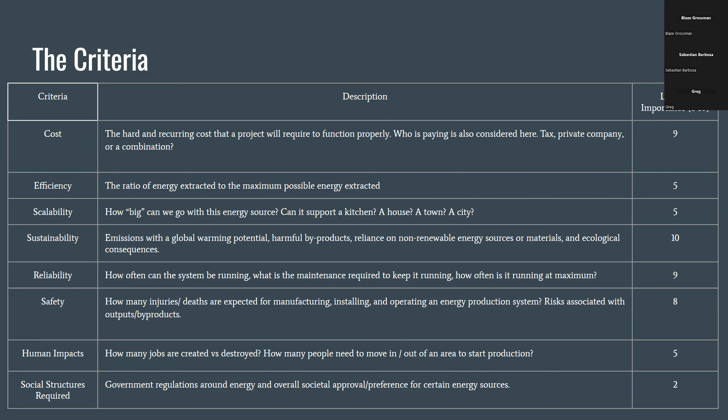so true. All right. So I researched the hydroelectric power.

So basically, hydroelectric power uses flowing water with a dam and channels the water through turbines, which then transform potential energy into electricity. Different types of turbines can be employed, primarily determined by the head of the plant and other factors such as efficiency and cavitation.

The world's top five largest capacity power stations all operate on hydroelectric power. On a smaller scale, hydroelectric power can provide power to smaller buildings with a running water source nearby, and they would only need a water diversion system, a turbine-slash-pump, and a generator to do so.

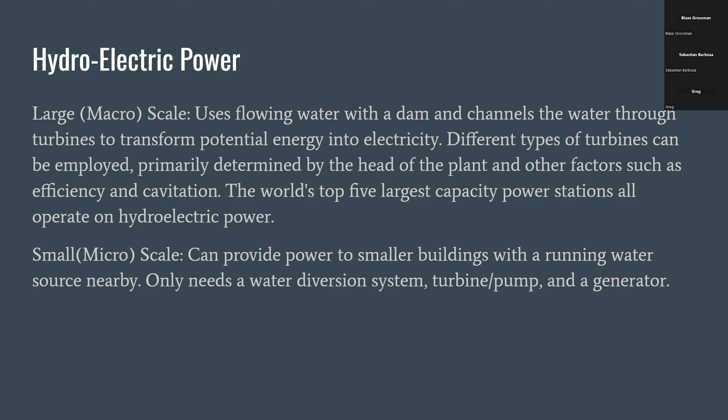Now for the cost criteria, when building a large hydroelectric power plant, you're going to be paying about $1,050 to $7,650 per kilowatt of power produced. On a smaller scale, it goes up a little bit, $1,300 to $8,000 per kilowatt.

But there's a pretty low maintenance cost and a long life for all the parts on the power plant. A typical lifetime for these plants is about 100 years, which is pretty good, and the maintenance costs per year are about 1.5 to 2.5% of the original investment, which is not that bad.

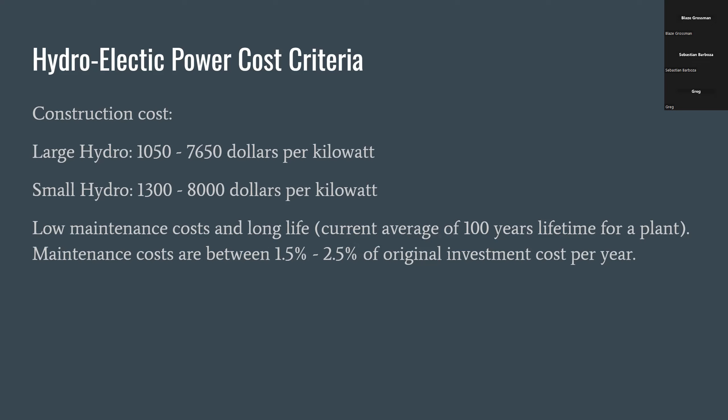In terms of efficiency, hydroelectric power plants have an efficiency of about 90% when converting the potential energy of the water into electricity, which is the highest efficiency of any energy source.

One of the components that contributes heavily to the efficiency of hydroelectric plants is the use of pumped storage, where basically the reservoir functions like a battery, storing energy in the form of water during periods of low demand, and then generating maximum power during daily and seasonal peak periods.

One benefit of pumped storage is the ability of hydroelectric generating units to initiate quickly and make swift adjustments in output.

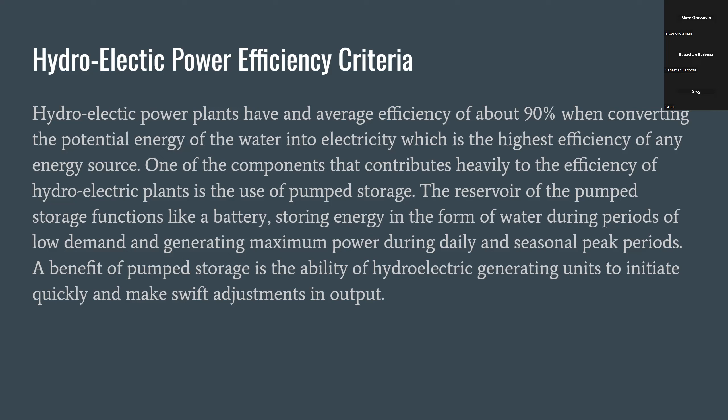For the scalability of these, it's pretty good because they account for the top five largest systems, but they can also be scaled anywhere in the middle and all the way down to a little tiny one, which could just provide power for a shack or something near a river.

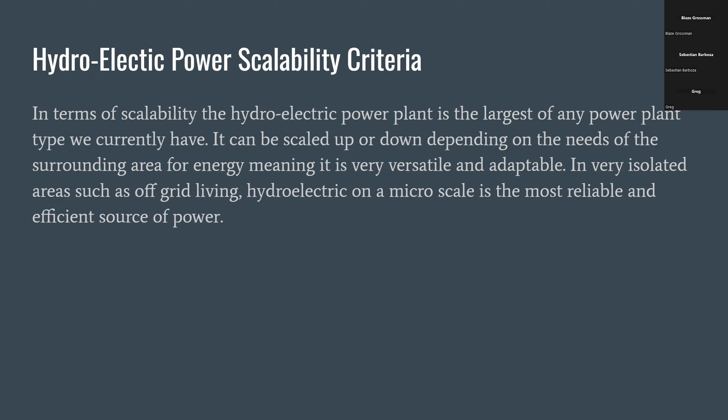The sustainability of these plants is pretty good. The only fuel that's used is the water to turn the turbines, which is entirely renewable due to the water cycle, which is powered by the sun. One negative effect is that when human-made reservoirs are constructed for hydropower facilities, they change the way carbon is emitted and stored in the river systems, which sequesters some carbon.

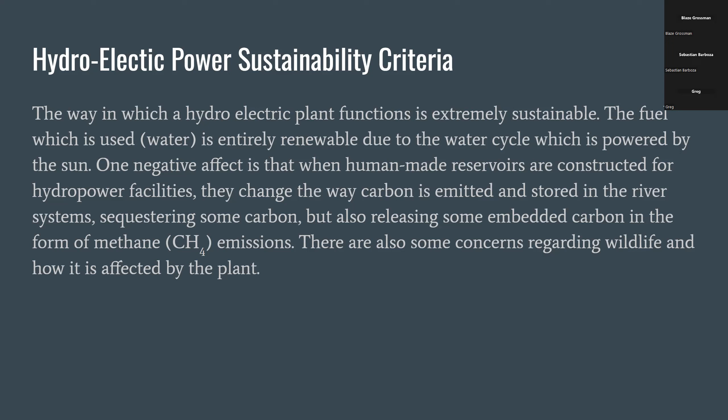There's also some concerns regarding wildlife and how it's affected by the plant.

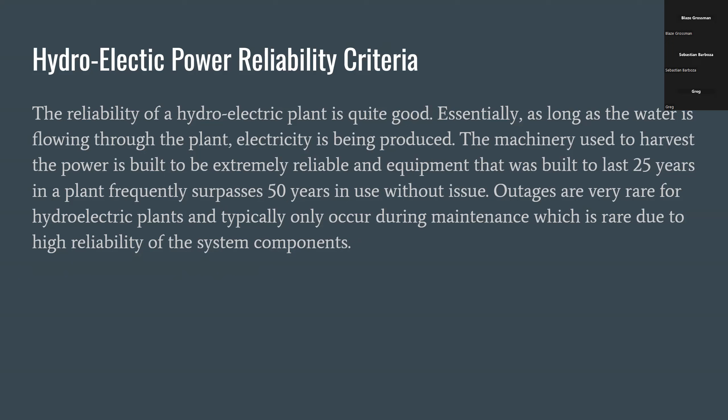For reliability, they're pretty reliable. Essentially, as long as the water's going, electricity is being produced, and the machinery used to harvest the power is built to be super reliable and lasts a long time, with outages being super rare. So that is pretty good for reliability.

In terms of safety, generally they're pretty safe, but sometimes, such as in the incident of the dam failure in China, 171,000 people were killed, which is not great. But it doesn't happen that often if you build them well.

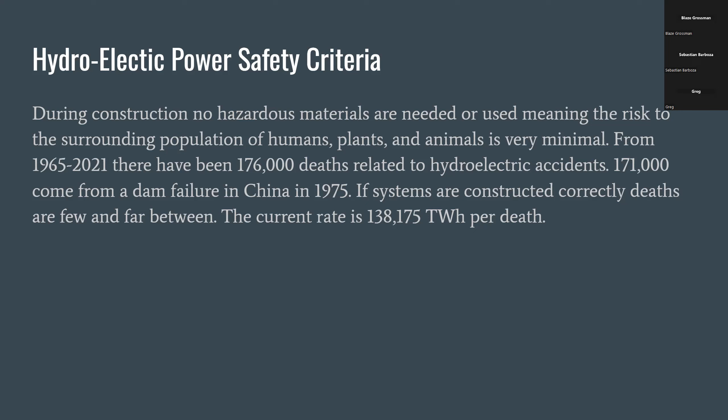Human impacts. There are both positive and negative impacts on people that result from hydroelectric power being installed. Some of the positive ones are that dams provide irrigation for different types of agriculture and can help with flood mitigation. The reservoirs are then often used for recreational purposes, which is pretty nice.

But some negative impacts are that the space for the installation of the plants can cause the displacement of people in the area, and the construction of dams has been used to oppress people in unstable regions of the world.

Overall, typically, the social structures, the people have a pretty good view on hydroelectric due to its minimal negative impacts on the environment and its outstanding efficiency. And if the area around the hydroelectric plant is carefully taken into account, there's typically no issue with affecting the ecosystem.

However, in some third world countries, the use of damming can be used to exploit the less fortunate, which could lead to a negative image of hydroelectric power for those people. But that wraps up hydroelectric, and I'll toss it on over to Blaze.

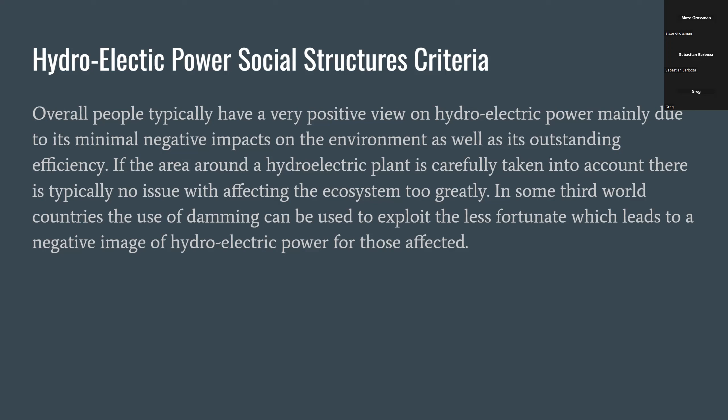All right, so wind turbines are essentially hydroelectric power, but with air as the medium. So getting right into it with costs, basically technology has advanced significantly in this industry in the last like 10 or 20 years, and the price has been significantly reduced.

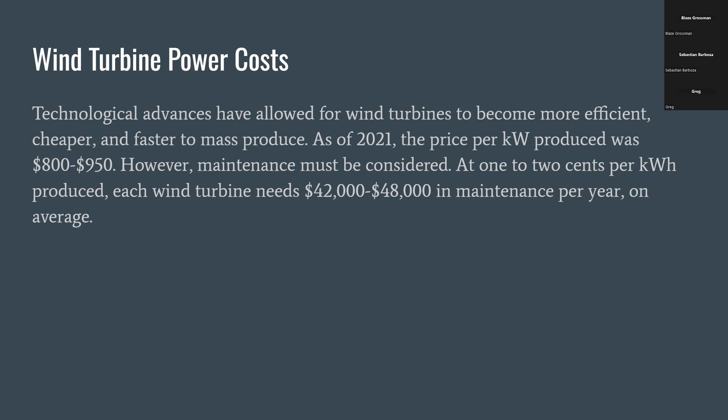As of 2021, the price per kilowatt was 800 to 950, but you also need to consider maintenance, and so 1 to 2 cents per kilowatt hour produced. Each wind turbine costs about 42 to 48 grand in maintenance per year on average, and that's going to vary based on different locations, weather, and those sorts of things.

So wind turbine efficiency, real quick, I just want to say that efficiency isn't that relevant for wind turbines because it doesn't really matter if you don't use all of the kinetic energy of the air to generate, it just doesn't really affect anything. It's not like burning coal or something like that, where you still have the fossil fuels and that coal could have been burned for something else.

But efficiency of turning the kinetic energy of air into electricity is 20 to 40% at best. That being said, larger turbines are more efficient. And so efficiency is reduced by several factors, including lower wind speeds, changing directions, and of course, turbulence.

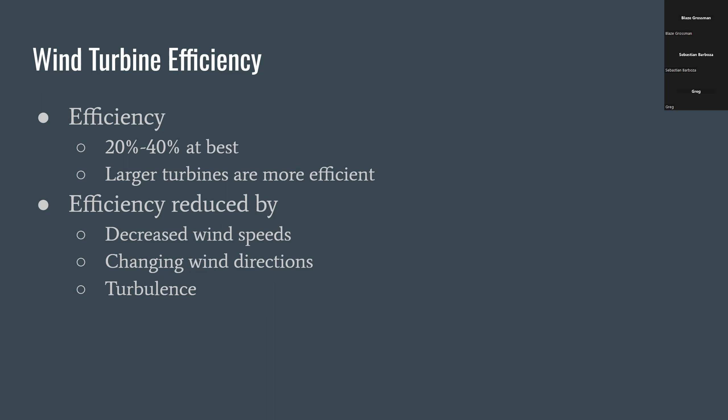All right, scalability. So scaling is pretty straightforward when it comes to wind turbines. It just means more turbines. And this is possible, but it requires a large open area. And so that kind of contradicts my third point, which is it's best if it's close to a civilization because energy is lost in transport of electricity. But this has been done and is currently done all over the world, but it's not extremely common.

And so one of the other reasons it's not extremely common is of course, that the production is limited by the wind at any given time. That's a factor we'll get into on reliability, but varying wind direction can be combated by facing the different turbines in different directions. But that's just, of course, going to mean that at any given time, they're all not going to be at the perfect right direction of the wind.

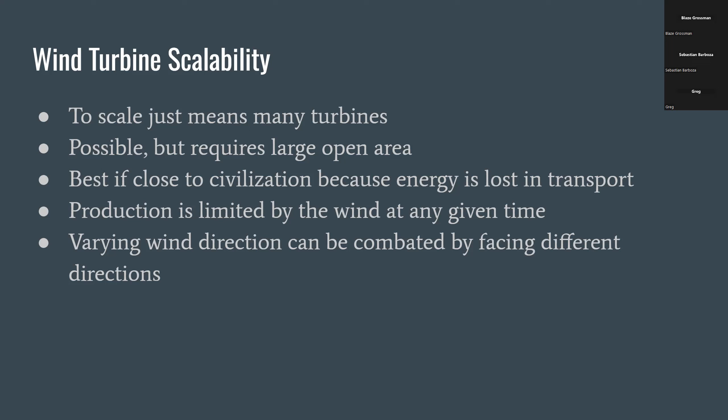Sustainability. All right. So, of course, wind is renewable energy. The only carbon production is in the manufacturing, transportation, and installation of these turbines. And one thing to get out of the way is that birds are killed because of wind turbines. And right now, it's estimated that 140,000 to 680,000 birds are killed each year.

It's kind of brutal, but there have been recent developments where if you paint the end of one of the blades, then the birds stop flying into them. But anyway, that's something that should be considered, as birds will often cross huge swaths of land. You don't want to just wipe out an endangered species.

And also wind turbines require a large amount of steel, and steel is 97% iron, and iron mining famously requires huge energy inputs and is usually highly toxic to the environment.

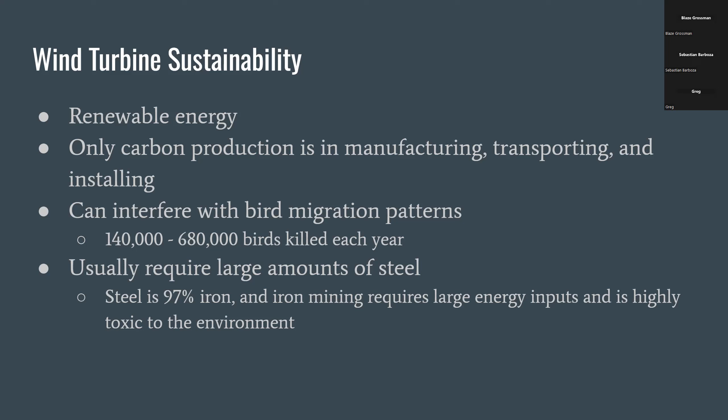Reliability. All right, this is one of the biggest concerns for wind power. So on average, March and April are the windiest months, with July and August being the least windy. This is on a nationwide level, but that's obviously different in different regions. And then there's also the issue that there's no real reliable long-term wind prediction. There's just too many factors and variables involved.

And of course, as I mentioned earlier, they require yearly maintenance. And so one solution to this reliability issue is if you have large batteries to store excess energy on the windy days, you could possibly supplement this with solar, and maybe you'd be covered all the way.

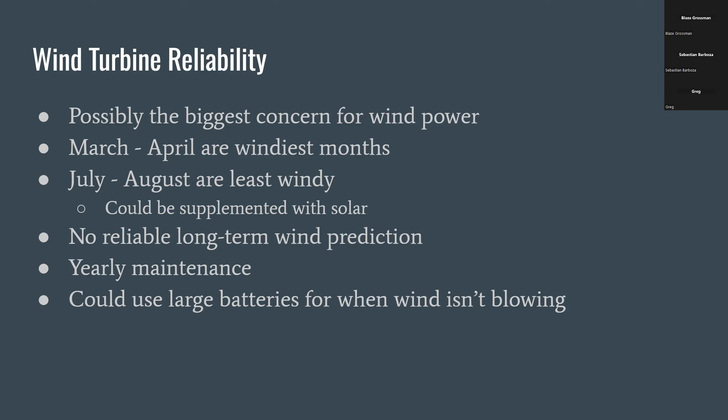All right, safety. There's not a huge safety concern with wind turbines. The only real concern for human life is during maintenance. And of course, it's just because these are inherently huge structures that can be a hazard to service. But only about 100 people die per trillion kilowatt hours, which is pretty good. And after the raw materials have been acquired, it's relatively one of the safer technologies.

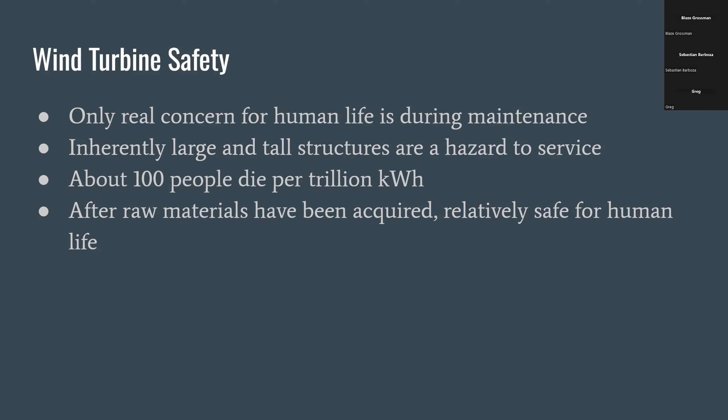Human impacts. Okay. So the price for consumers isn't very high, as it's only about 1 to 2 cents per kilowatt hour. But it's pretty costly to create one of those huge production farms. And one of the good human impacts is there's the possibility that you could bring cheaper energy to more people, and pretty much everyone benefits from that, not just the people directly. So that's great.

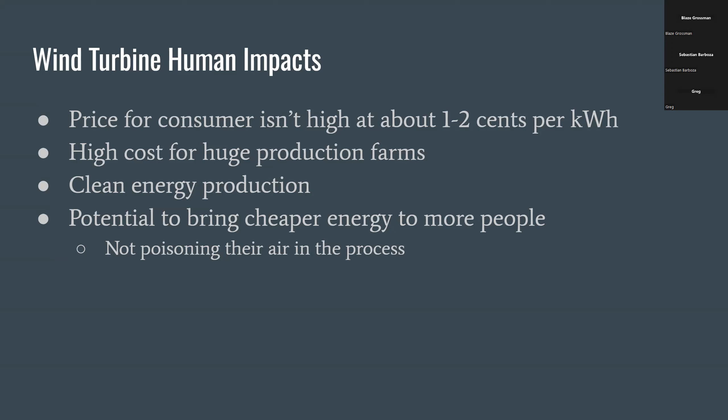Social structures. So usually wind turbines are supposed to be certified. Their design is supposed to be certified before building. And also, they're typically built from government subsidies, i.e. taxpayer dollars.

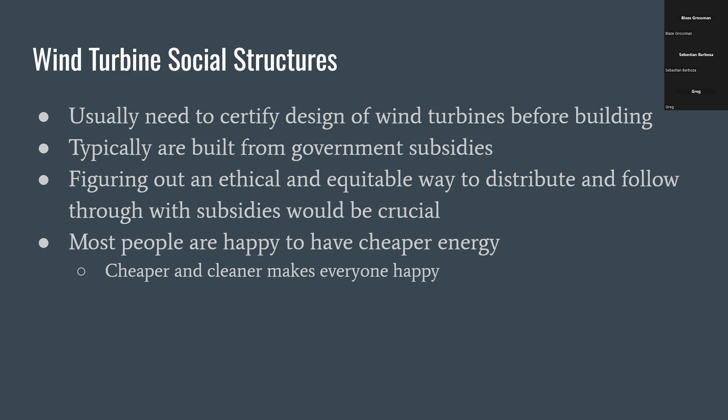And so figuring out an ethical and equitable way to distribute and follow through with subsidies is crucial, because money is money, but it's difficult to get equitable and ethical access to the people that should get it. And as I mentioned earlier, most people are just happy to have cheaper and cleaner energy. So with that, wrapping up wind turbines, I'll pass it to Sebastian.

Okay, so the power source that I looked at was the thorium power plant, or specifically the liquid fluoride thorium reactor, call that a LFTR for short. It harnesses nuclear fission, not a fusion reactor, and heats a molten salt that usually powers a typical Brayton cycle, with helium, nitrogen, or carbon dioxide as a working gas. It could be incredibly small, powering only 2 megawatts thermal, up to 1 gigawatt thermal, and possibly even larger.

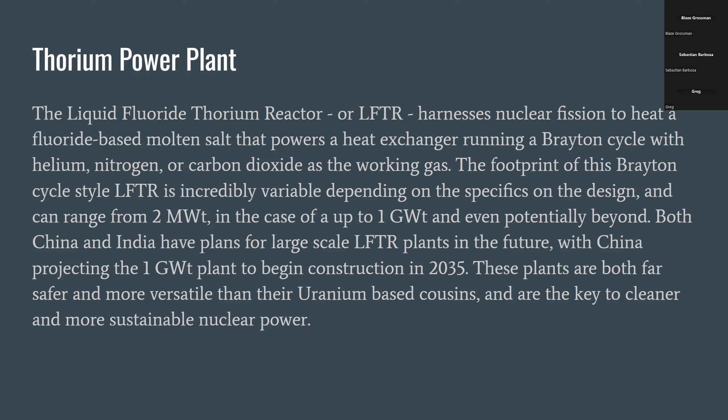Many different countries are creating plans to build these kinds of reactors, with China and India most notable. And China is actually the one that plans to build the 1 gigawatt plant. They're far safer and more versatile than uranium-based plants and are the key to more sustainable nuclear power. For the typical 100 megawatt size reactor, costs are estimated to be 2,000 to 4,000 dollars per kilowatt electrical, with an initial investment of $200 million per unit.

These are pretty cheap costs, and the reason for this is the ability to produce these units on an assembly line. The reactors themselves operate at atmospheric pressure. They're not pressurized at all, and they don't need any kind of emergency cooling because they're passively cooled. We'll get to that more in the safety section.

The reactors also last for a very long time and need relatively little maintenance. They're designed to last around 80 to 100 years, depending on the model. And the maintenance that they need is generally to replace the external components, such as the turbine or the compressor, that aren't necessarily core to the nuclear reactor itself and can be replaced pretty easily and cheaply.

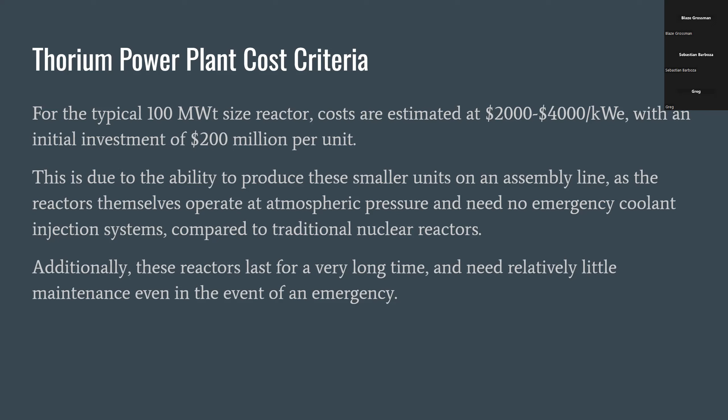LFTR plants are the most efficient nuclear plants to date. A very specific 198 megawatt thermal design that was being looked at by NASA has a thermal efficiency as high as 50.5% for the total plant, which is way higher than the 30 to 33% plant efficiencies achieved by classical nuclear plant designs, and even the 45% efficiencies achieved by modern nuclear plants.

This is because of the very high turbine inlet temperature of 1200 Kelvin, and the nature of the helium working fluid, which is often the most efficient working fluid out of the three possible. This model actually, interestingly enough, had no reheat and instead only had intercool technology in the Brayton cycle, which was much higher efficiency than the option that did have reheat and multiple turbines.

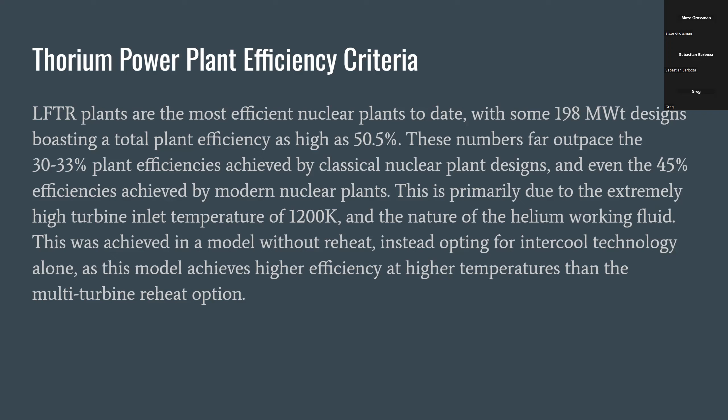The LFTR plants can be scaled to deliver different power ranges, as can be seen from the production of the Chinese SINAP group. They aim to produce 2 megawatt thermal, 10 megawatt thermal, 100 megawatt thermal, and 1 gigawatt thermal units by 2035. And they're going to begin construction of commercialized versions later in 2035. The mechanics of the design change very little depending on the output of the reactor core.

But for the mass production and ease of efficiency, the 100 megawatt thermal design seems to be the most popular international choice, backed up by India and even the United States design. Still, the footprint is pretty small, so you can build a bunch of them next to each other, and the Indian government is planning to build 19 such reactors in Gujarat by 2030.

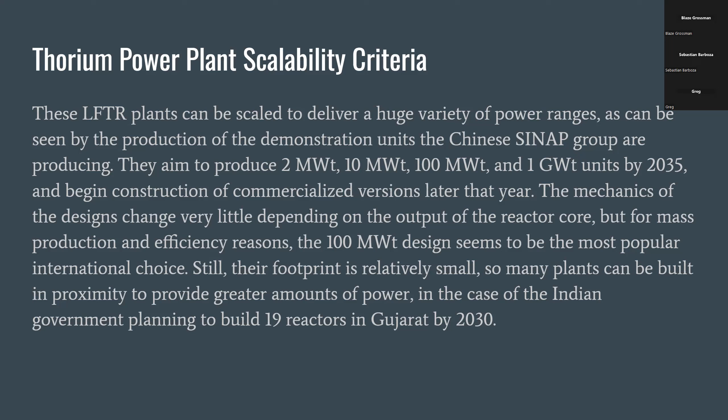LFTR reactors are among the most sustainable nuclear reactors in existence. This is because they depend on thorium fuel instead of uranium, which is several hundred times more abundant than the U-235 in the Earth's crust. Thorium doesn't need to be enriched because it's fertile instead of fissile, meaning that the thorium itself, rather than being distilled down to some specific isotope that needs to react, such as U-235, it instead can just

be used in bulk. It also produces significantly less nuclear waste by volume, about 300 times less, and what it does produce is significantly less radioactive and toxic. The waste is 83% spent in 10 years and below background radiation levels in 300, which is miles better than what we're dealing with now.

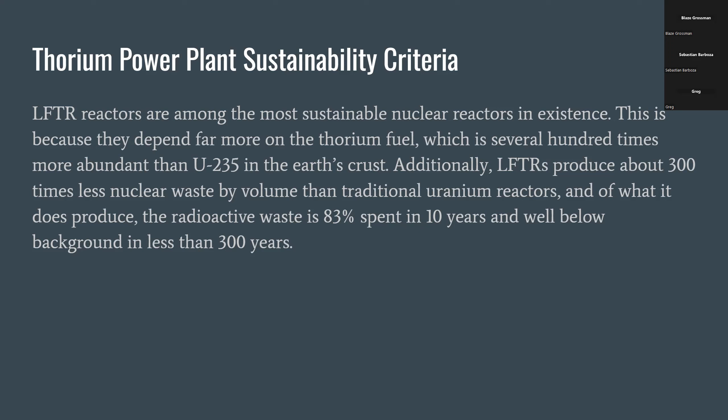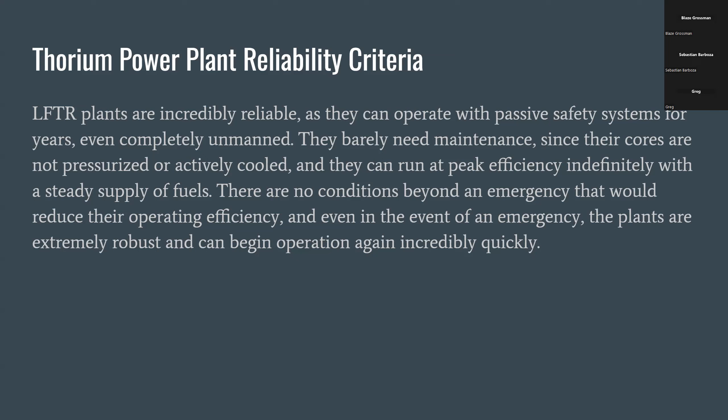Once again, passive. There are no conditions beyond an emergency that would reduce their operating efficiency, like in the case of wind or water power. There's basically no reason the nuclear power plant would ever stop. And even in the event of an emergency, the plants are extremely robust, and once they're drained properly, as can be seen in the safety section, they can begin operation again very quickly.

Obviously, safety is the biggest concern when you hear the words nuclear power. LFTRs have blown this concept out of the water. They're completely unpressurized and aren't actively cooled, so you won't have any accidents like Chernobyl or Three Mile Island. They don't deal with steam. They deal instead with helium, which basically makes this whole positive void coefficient problem from Chernobyl impossible.

They are immune to meltdown because the fuel inside the core is already a molten liquid. There is no meltdown possible, and the entire reactor is designed to contain this molten liquid already. They also employ passive safety systems instead of active cooling. So if the power ever fails and there's no one present to deal with it, the reactor will still regulate itself in a safe method.

The reactor itself has a freeze plug at the bottom that is actively cooled and will only stay solid as long as it is powered and as long as the controller deems it necessary. So if anything ever happens, the freeze plug will go out first. If the power goes out or if someone presses the emergency panic button, the freeze plug will melt away, and all of the fuel will be drained out into a tank stored deep underground that allows you to safely store the contaminated fuel or whatever the problem is until the tank can be drained at a later date.

Additionally, thorium is not fissile without the plutonium component stored above the reactor. So as the salt fuel is drained away, it is taken away from its fissile component and cannot run away in any kind of further reaction.

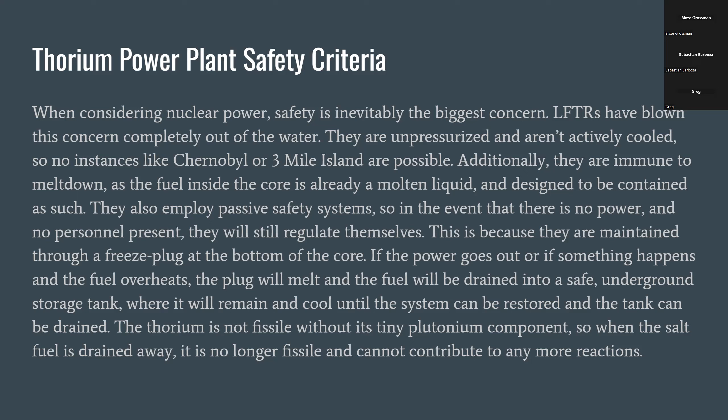The biggest question regarding human impacts when considering nuclear power is inevitably safety related once again. The locational safety component has been pretty much addressed. There's not very many environmental dangers from the reactor. So all that remains to deal with is the weaponization concern. Fortunately, thorium plants can't be weaponized.

Non-proliferation is guaranteed since the amount of plutonium contained in one reactor is far too small, orders of magnitude too small to create a bomb. And thorium is not fissile, so it can't be weaponized any more than any other metal could.

Additionally, thorium is much safer to mine. It doesn't produce any of the toxic gases that uranium does, so the mining process for uranium is actually incredibly dangerous. Not a lot of people know this, but thorium doesn't suffer from any of those problems and is much safer to work with in pretty much every way.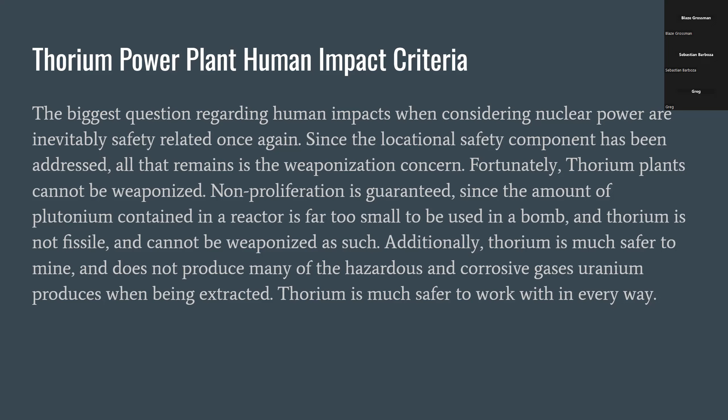The main issues standing in the way of this technology are centered around social structures. People just don't like nuclear power at all, and even those heavily in favor of the environment and sustainable energy are usually opposed to nuclear solutions. A great deal of education needs to be done on the subject before people are willing to accept this technology in their backyard, before people would be comfortable living around such a reactor.

The environmental impacts of these reactors are also minimal, as they don't produce large amounts of heated water to dump into the ecosystem. And as I already mentioned, the spent fuel is quite safe compared to current nuclear reactors.

Other countries have less problems with nuclear stigma, and China and India are both making great strides towards using this technology to boost their own economies. China, for example, plans for 10% of their power to be nuclear-based by 2030 and 18% by 2060, and a large amount of this production would be thorium technology.

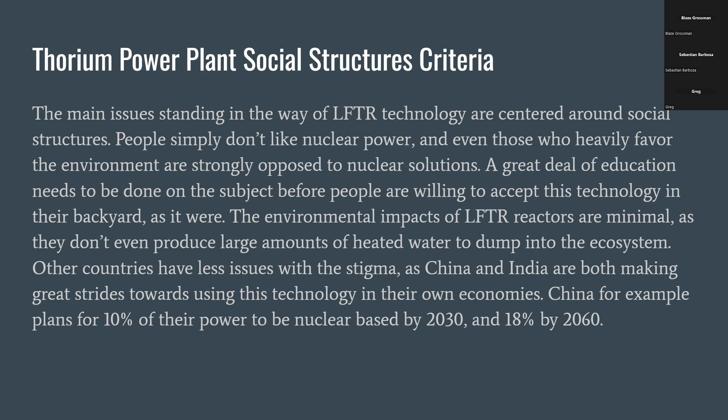All right, so looking back on our project after we all came together and finished our various power production technologies and researching them, we decided to reflect on what we learned and what we could do differently next time. One of the biggest things we all agreed on was that the weight of different categories greatly affects the outcome, and so in some ways the weight is somewhat arbitrary.

And the categories themselves are also broad, so assigning values and pass/no pass grades to the criteria is quite difficult.

One of the reasons the weight is partially arbitrary is that, take sustainability for example. We had it weighed high, as arguably it should be, but under sustainability there are categories like how much does this pollute the surrounding waters, how much does this increase CO2 or methane levels in the atmosphere. One of the issues is that these are all under the same category, and how can we basically say those are equivalent, and that their negative impacts are equivalent, when we put them under the same category. So further discerning the categories would be one of the biggest things we would do.

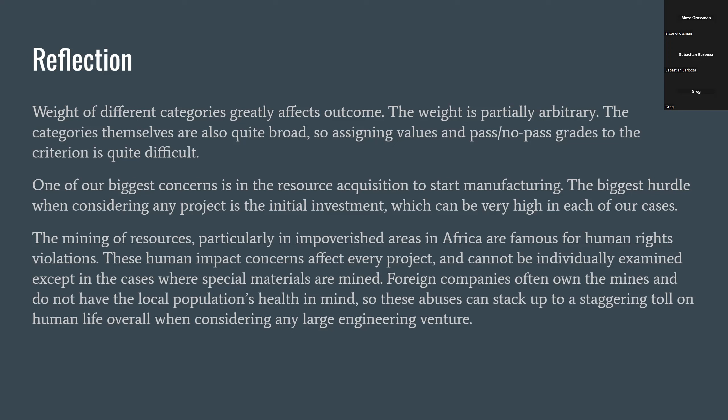That's so true, guys.

Now basically this is our table of results, where we have the level of importance down here, and then the rating that we each gave to our individual energy sources. Based on these, out of a max score of 53, thorium won out over the other two by 0.6. So that is the one that we would have to recommend going into the future.

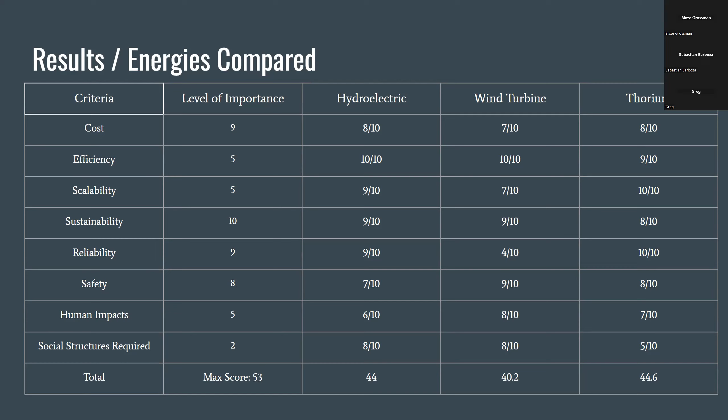And that about wraps it up, I believe. Does anyone else have anything they would like to add? No, I think we're good. All right, yeah, I think we're good. All right, I'll stop it here.